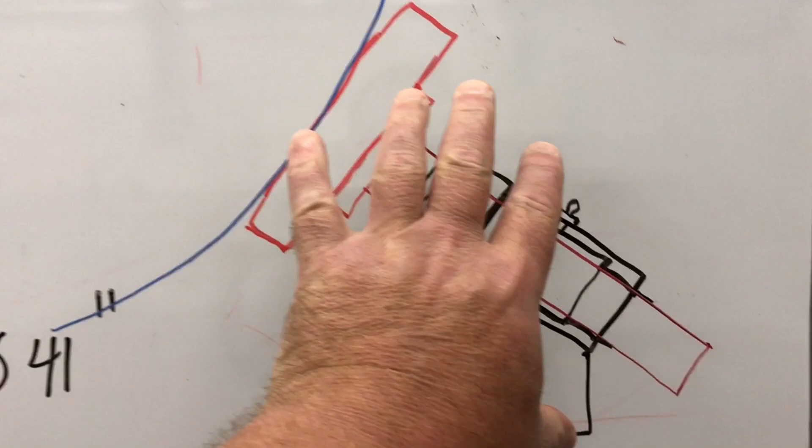Hello. Today I wanted to do a short video on trying to fix a purchased nut. What you see in front of me is an assembly I've come up with for the auger boring machine project, to support the pipe that runs along the skid. The blue part is the pipe, and this is the assembly that'll hold it, with a mirror image on the other side.

Unfortunately my whiteboard is full of other details I don't want to erase, so I've only shown half of it. But anyway, these two pads sit at 45 degrees like this, and the pipe sits in them so it acts almost like a V-block. Then this piece is a 2.5 inch diameter Acme rod, threaded, and this is an Acme nut.

And then this is a hex. You can put a large wrench on here and turn it, and you can move this out and in to adjust the pipe once you have it in, and also move it in a more coarse way to adjust for different sizes of pipes.

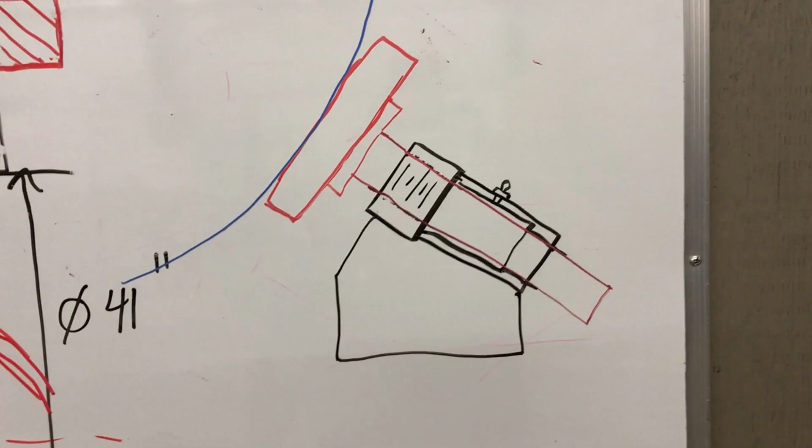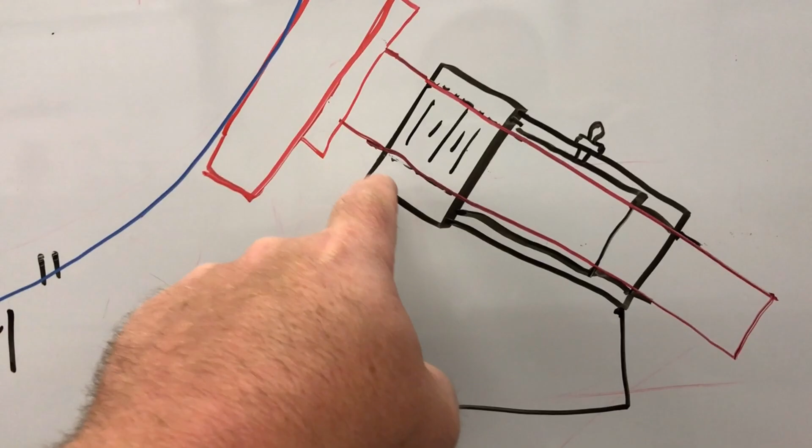The basic idea of the design is that there's just a frame here, and then there's a nut, and I need some support outboard of the nut because there's going to be a lot of force coming out from the weight of the pipe.

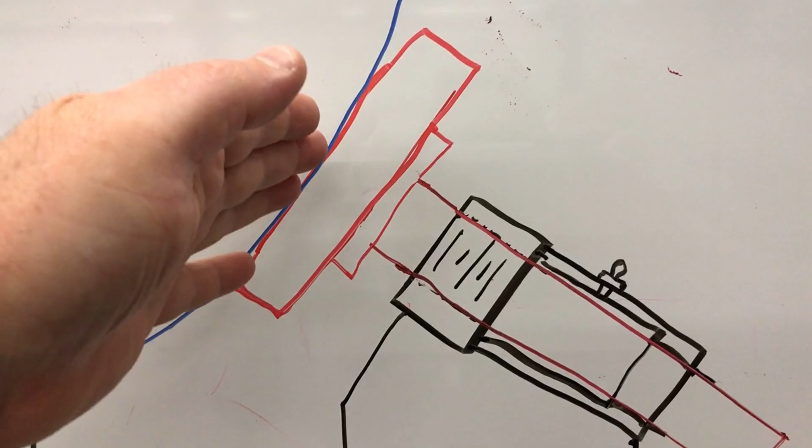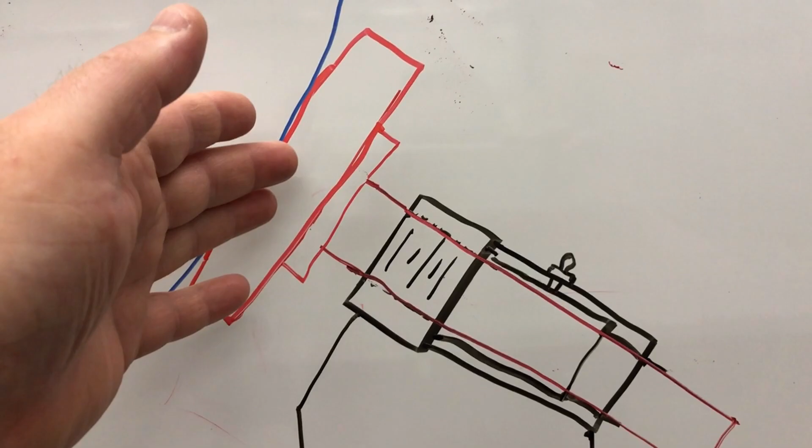The pipe itself with the augers and dirt in it could weigh 8,000 to 9,000 pounds. So you're looking at, say, 4,000 pounds on each one of these supports. And you could have hundreds or even maybe low thousands of pounds of force coming out from the friction of the pipe sliding along this support.

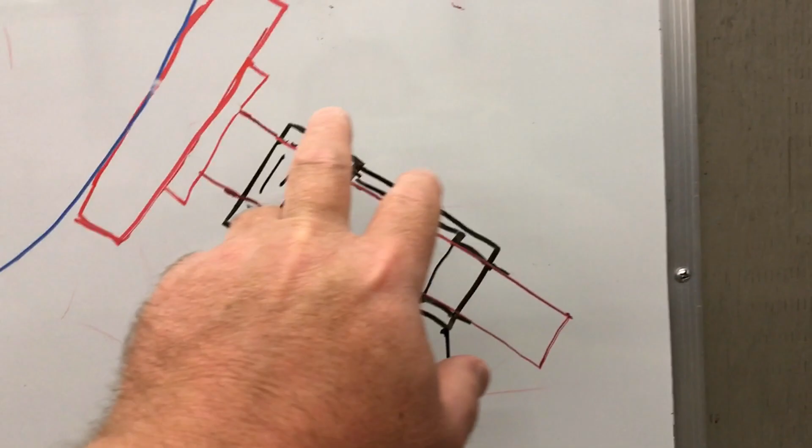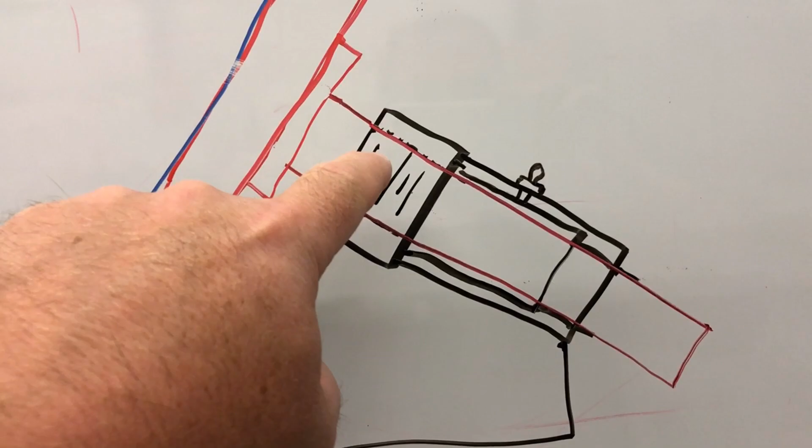So this Acme rod needs more support than just what this nut can give it. My plan was to machine a part like this, a round piece, and have it neck down to be just a close sliding fit over the major diameter of the thread, so it'll pass through the nut and allow it to advance or retract.

But this going on the OD of the thread will give it more support and just stabilize the assembly so it's not rocking back and forth.

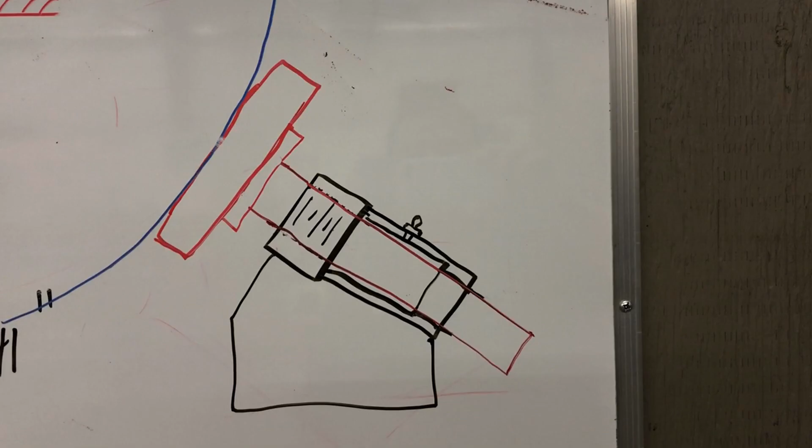It turned out I was able to buy Acme rod for probably just about the same price it would have cost me to buy the raw material if I was to make it myself. And I got nuts as well, so I didn't have to make the nuts.

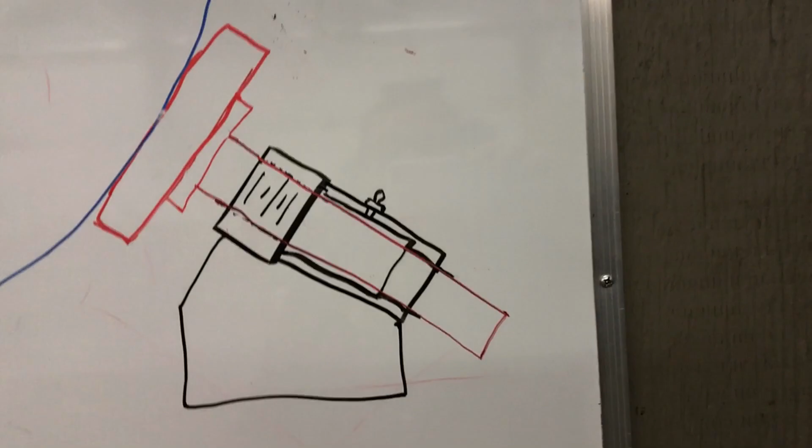One of the things I have to do is the nuts are hex nuts, and in this situation I want to machine the hex off and just make it round.

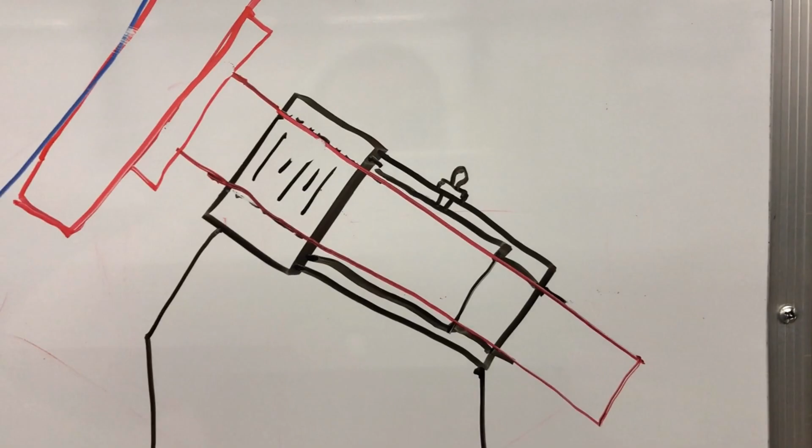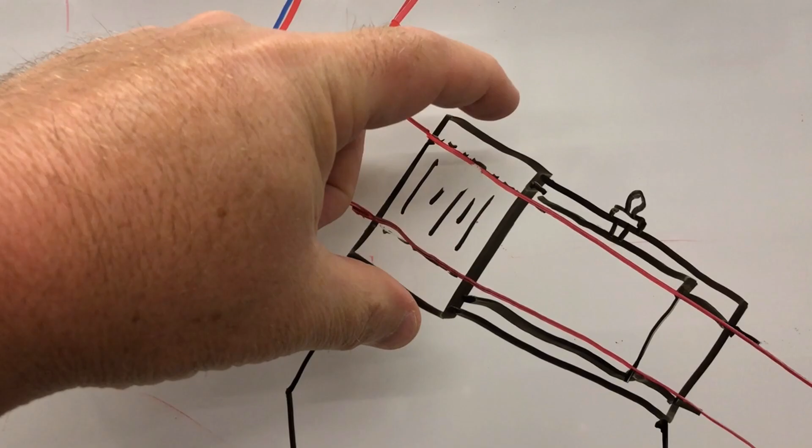To do this assembly, what I want to do is make this piece with the hole undersize, then weld it on, and then set it up in the lathe so that the pitch diameter, the axis of the thread itself, is running true, and then bore this out to size so that they're concentric.

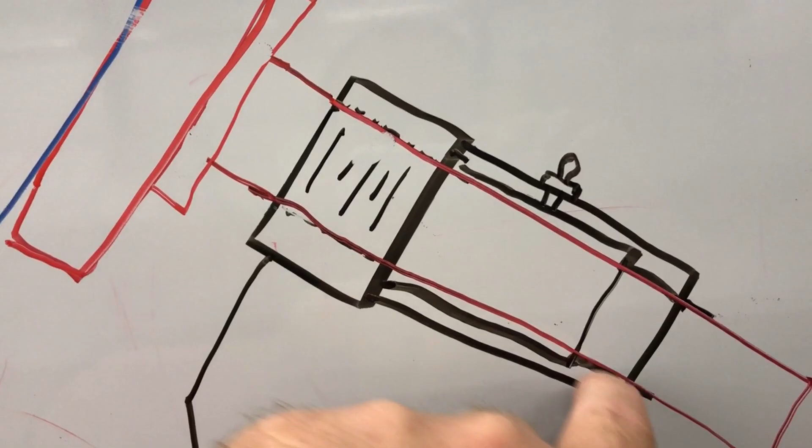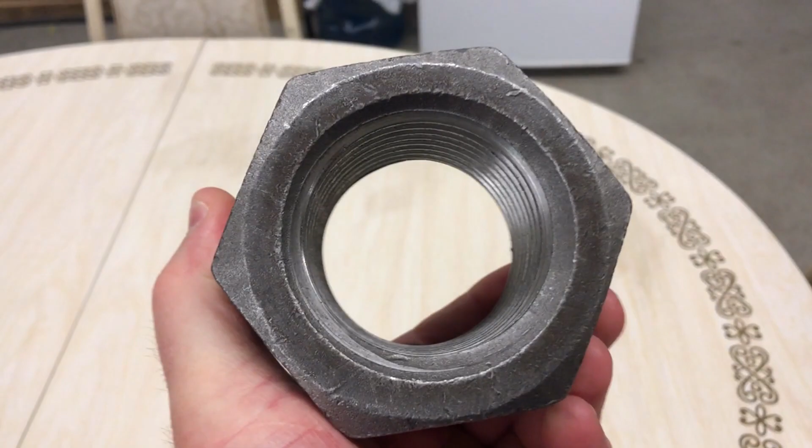And then this is the problem I ran into. This is one of the Acme nuts, and the manufacturer made essentially no attempt whatsoever to relate the axis formed by the pitch diameter of the thread to any of the other features on this nut.

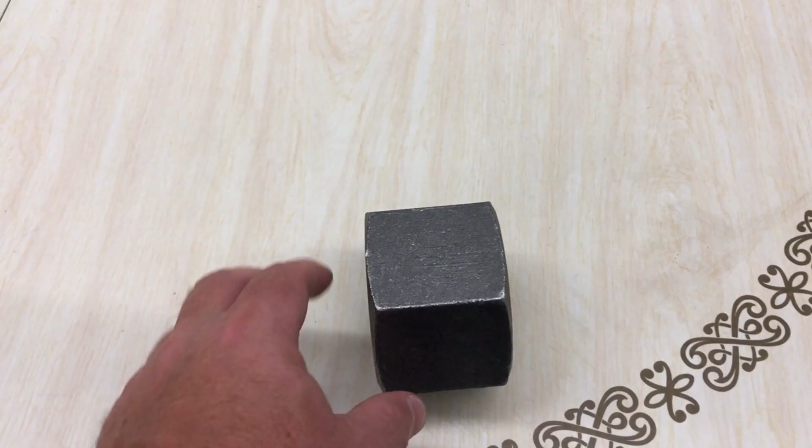So the hex itself tapers somewhat. It's not really noticeable by eye, but if you measure it with calipers you can see. The faces run out. If you were to mount this on a threaded rod so it's actually running on the threads, you see the sides of the nut just wobble, and not even necessarily together. They're out relative to each other, and they're out relative to the thread.

There's not a surface on here, not even the minor diameter of the thread, that's necessarily concentric to the pitch diameter.

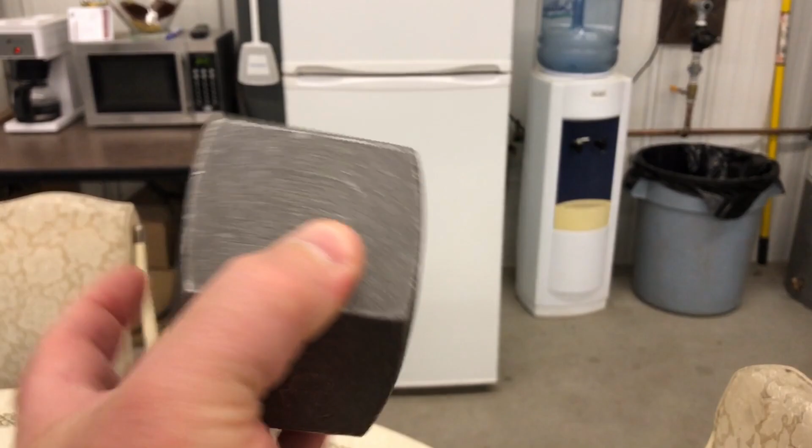I think when they make these, they form them and then grit blast them, and they get this sort of dull gray finish. Then however they machine the threads, they put it in a machine and machine them. And if you look at the minor diameter of the threads, it still has the grit blasted appearance.

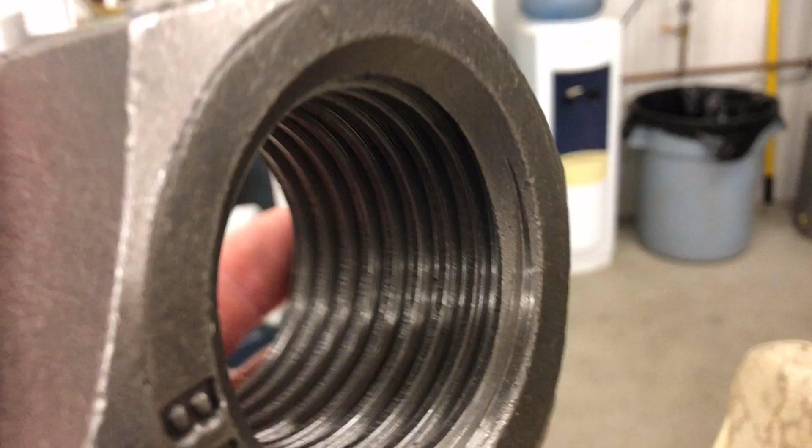So it's just whatever was there when the thing was first formed, and it doesn't even run concentric to the pitch diameter, so you can't even chuck up on the inside on the minor diameter to hold it.

So I needed to come up with a way to actually establish some features on this nut that would be concentric to the axis of the pitch diameter, and that was the purpose of this video. I wanted to show what I came up with.

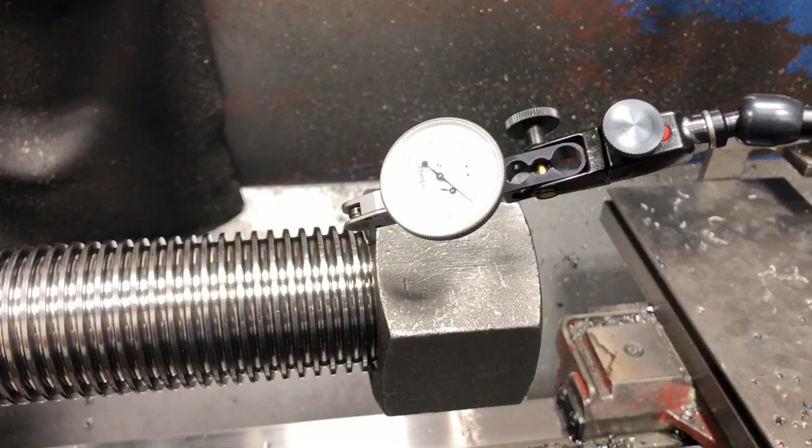I've put a nut on this lead screw, and the lead screw is running pretty true, within a few thou, and I just thought I'd show you some of the run out on the face of the nut.

We're at least 25 or more thou run out on that side. Same thing on the other side. 25, just about 30 thou run out on the face.

As I mentioned earlier, the minor diameter in the thread isn't concentric with the pitch diameter. The hex isn't related to the pitch diameter at all. Everything on the nut is out.

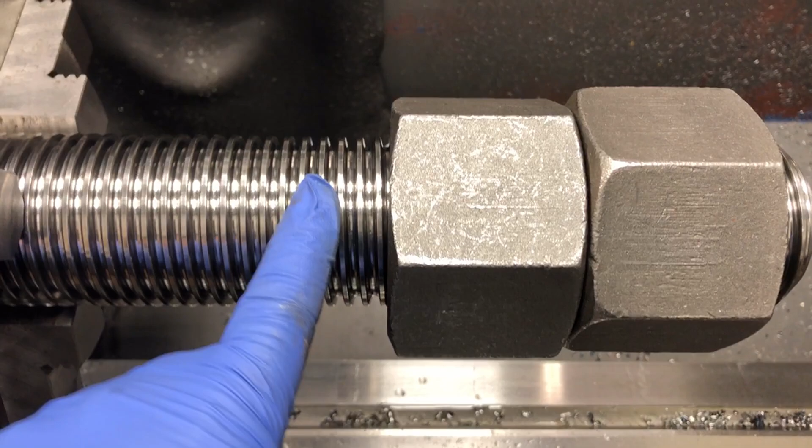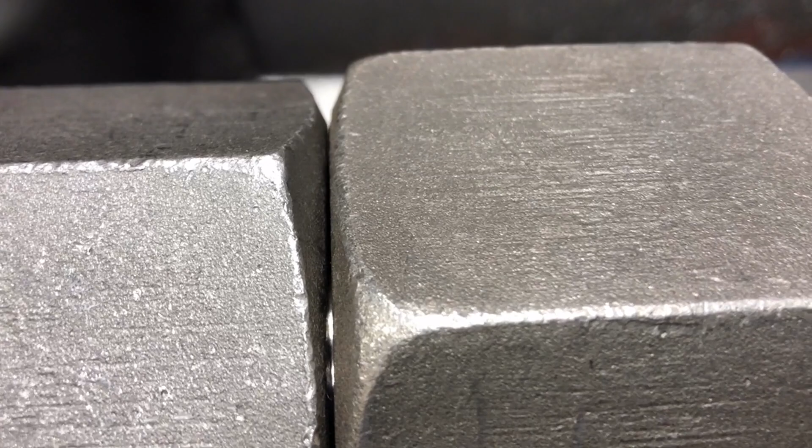This was my first attempt at trying to get the nuts to run on their pitch diameter by pushing them up against the thread flank of the outside of the threaded rod. But as you can see, at the top, the nuts are kind of touching, but at the bottom they aren't. There's a gap there.

What happens is when you tighten these against each other, the force is up here, so this nut goes that way and this nut goes that way, and they don't actually load equally on the thread flanks all the way around. I tried different combinations, flipping the nuts around, backing them against each other, hoping at least one combination would be flat. None of them would sit flat on each other.

So I thought for a while, I wasn't sure what I was going to do, and I came up with the following idea.

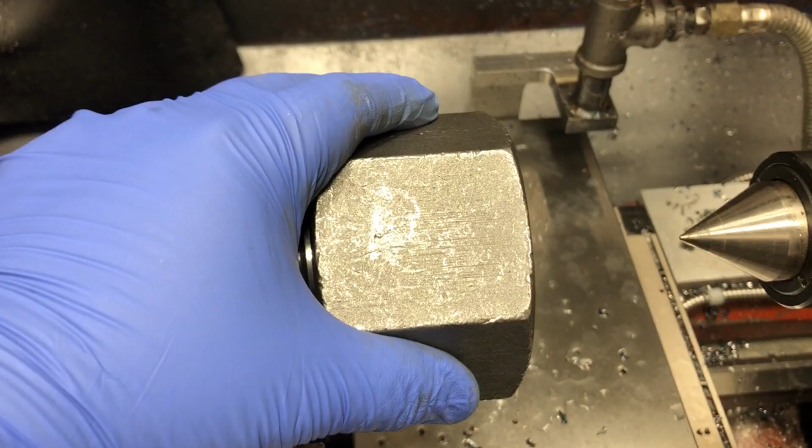Now, in order to get this nut to ride up on the flanks of the threaded rod and hold itself essentially square to the axis of the pitch diameter of the rod, you need - this nut's loose, it's got some play, not a lot, but it's got some. You need to find a way to load this nut so that it's being pushed evenly all around and not being pushed just in one corner.

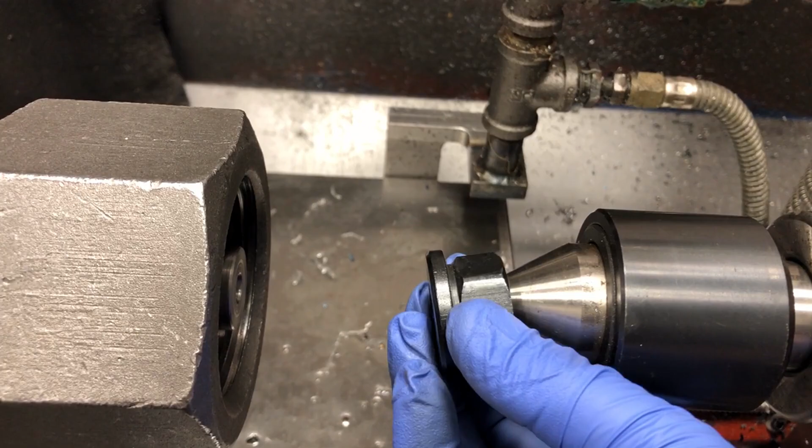And the technique I came up with was sort of like an equalizer bar. Put a bar across and then push it with a tailstock. What I did was, so the point wasn't just pushing on the bar - I'm gonna put a nut on here and push on it like that, and then this can pivot around to whatever it needs to.

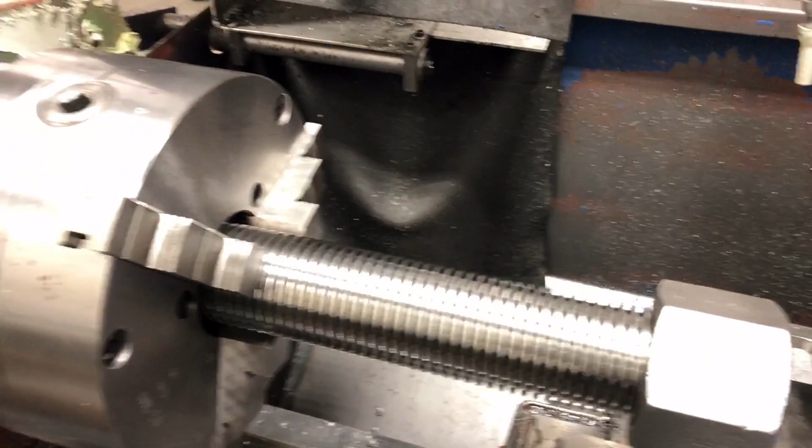This is an idea I got from David Wilkes from his excellent site. He uses this often because he turns from chuck to tailstock, and when he has big pieces in the chuck and he's turning, he just likes to support it with a setup like this so that the piece doesn't walk out of the chuck. It's actually a good way of supporting things like this because it allows it to go off at an angle, and it doesn't load the extreme point of the center where it might get damaged.

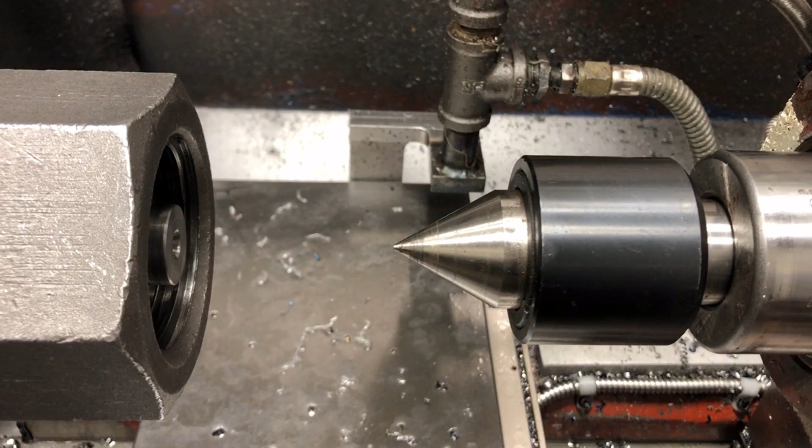And that's the setup. I couldn't show myself doing it because I need two hands. I don't have a stand for my camera, so I had to put the camera down. But you can see it's not perfect because it's only pushing in the two places, but it's very close to loading that nut up evenly all around so that it has a chance to load up on the thread flanks without being pushed off to one side.

What it does, however, is it makes it so you can't machine the end of the nut. Obviously the bar is in the way. So then what you do is you come in and you machine this face of the nut using this tool, and it gets pretty close to the thread.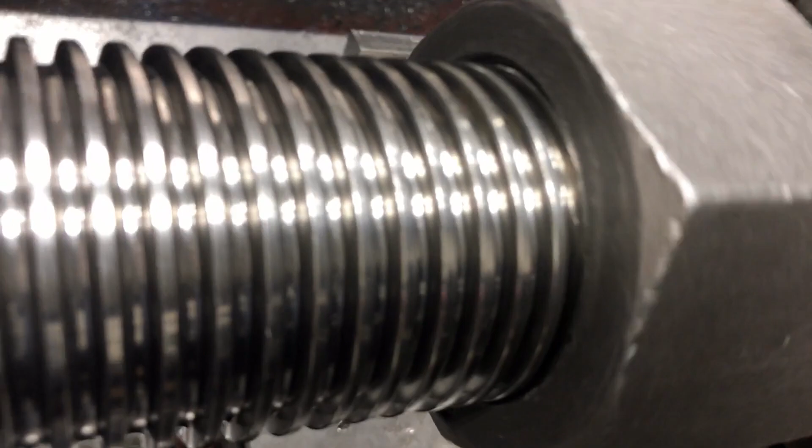I don't want to hit the thread on the threaded rod. What you do is you just go in with the tool with it not turning, and you touch on there, and then just back out about 10 thou and zero your readouts, and then you know to stop when you hit zero on your readouts.

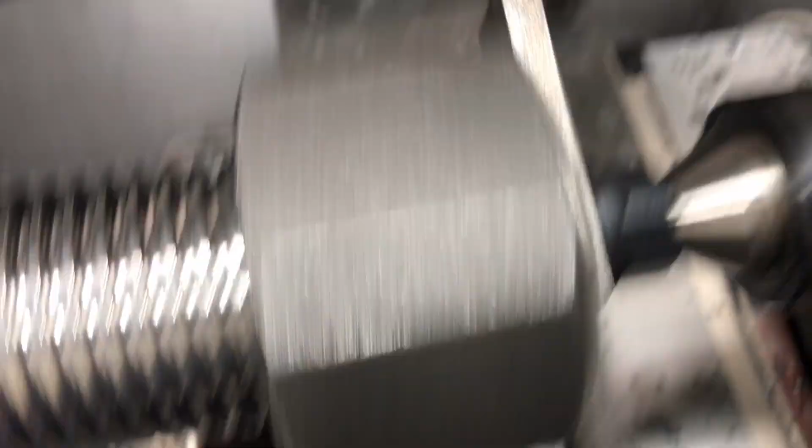In this view, you can see the wobble is pretty apparent, and that's what we're going to machine away. I've taken about a 15 thou depth of cut, pretty light depth of cut. I don't want to put too much load on this, as the nut's...

its resistance to the torque of cutting is simply the friction applied by the tailstock, by the force applied by the tailstock, causing friction between the thread flanks and the nut. So I really don't want to take a heavy cut and have the nut jam. If the nut does jam, it's going to want to start walking down the thread, and then it's really going to dig in. So I just need to be careful with the size of cuts.

Anything you do besides light cuts, keep your foot on the brake.

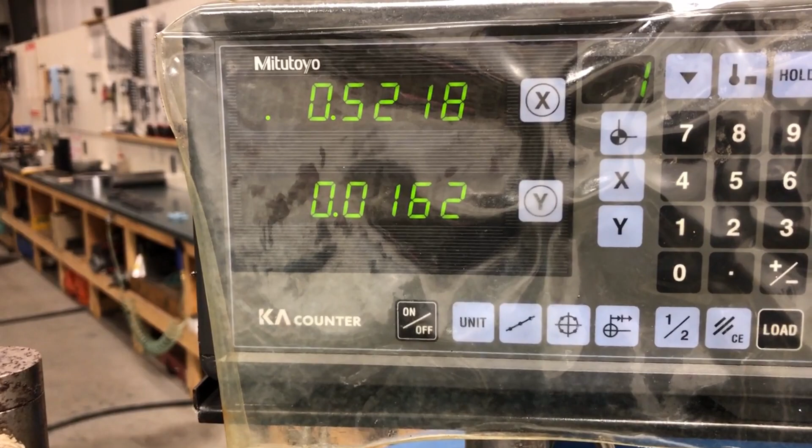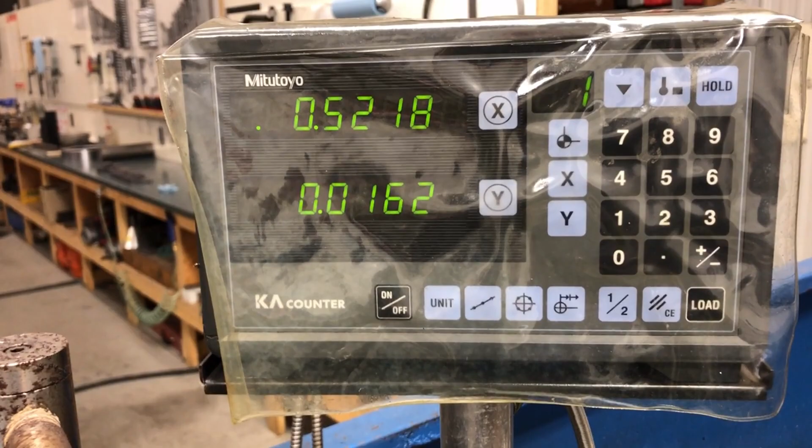Move the carriage over until it just touches, and then look at the readout. Now, what I didn't show you before was when I started the cut, I zeroed the readout. I originally took a 15 thou deep cut, and then I zeroed the readout. Now I see that I've been able to move the carriage a further 16 thou in pretty much the middle of the area that didn't clean up. So that tells you I need to take at least 16 thou for this to clean up. So probably what I'll do is take another, say, 15 thou cut, and then a 5 thou for a finish.

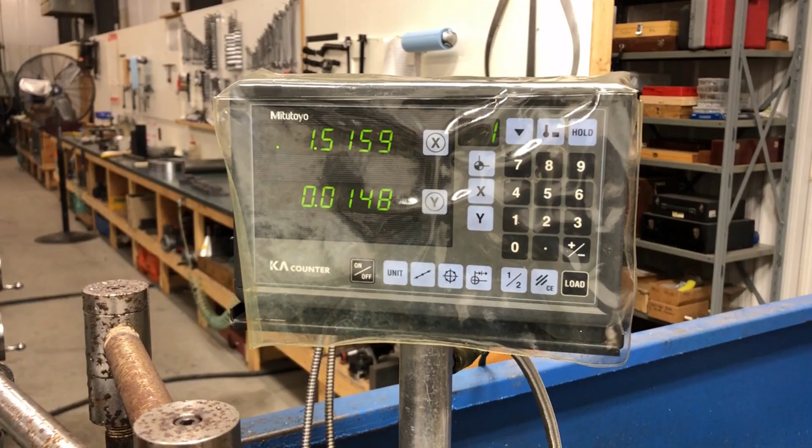Pounding, as there's a couple of letter B's stamped in the end of the piece, and that's what that pounding is. It makes an interrupted cut.

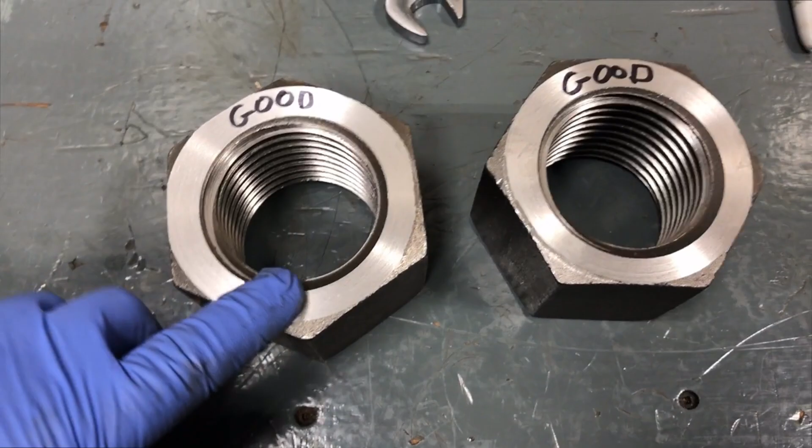And then I will set the other nut up and do that, and then I will show you how I do the opposite faces of the nuts. There, so now I have two nuts where the surface has been faced and it's good. It's square to the axis, and we can tell it's good because it says so right on there. Now what I'll do is, instead of using the same technique to machine the back side, now that I have two good surfaces, I'm going to put them on the threaded rod and back them against each other, and then I can machine each end.

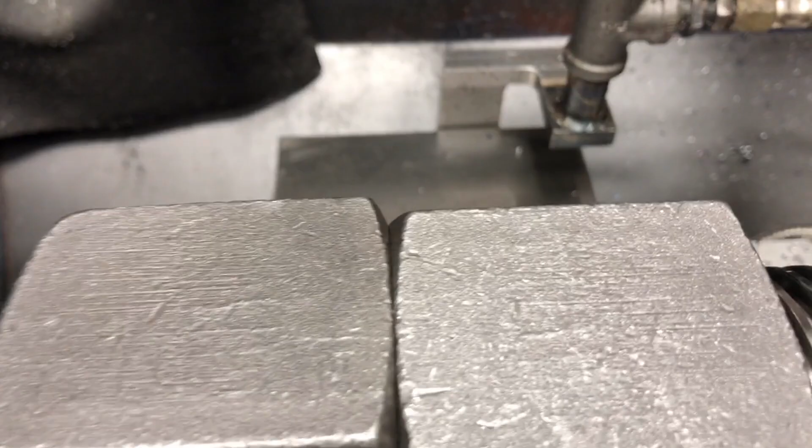So this is the setup to face the other two sides of both nuts. These are the two good surfaces backed against each other. There actually still is a very small amount of light, I'm not sure if it's going to show up very well or not. So they're not perfect, but they are a lot better than the original as-received nuts.

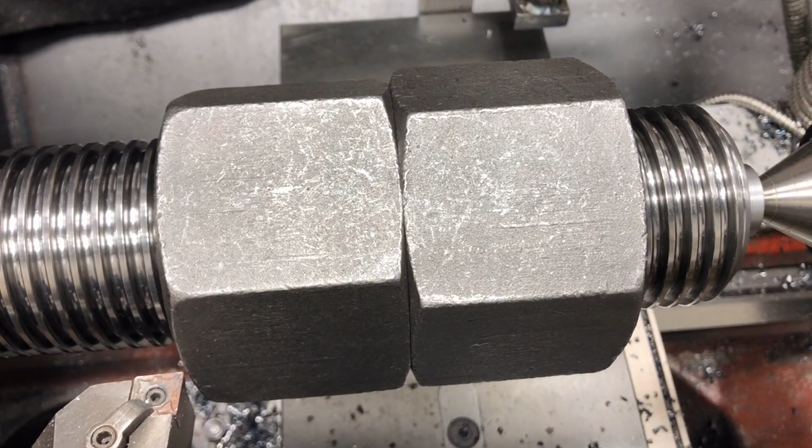And actually, I'm filming these a little bit out of order. This is the second set of nuts I've done, and the first set of nuts I didn't get any light between them, so those must have went a little bit better than these. But regardless, it's enough of an improvement for the job I have to do here, and it's definitely improved them over as-received. So just kind of the same thing, I'll take lighter cuts.

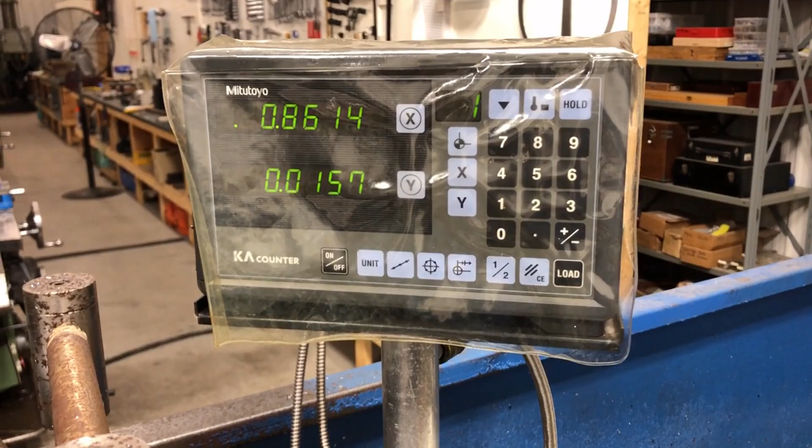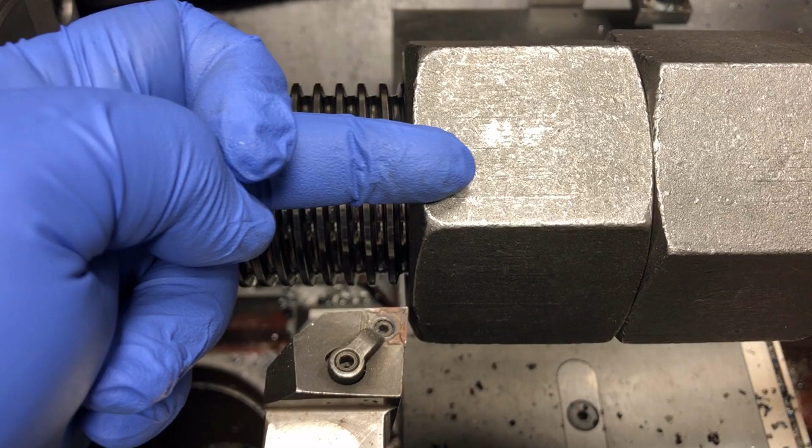Same issue: if the nuts jam, they're going to walk back this way towards the tool. Having thought about this since I did it, probably the safest way to have done this would have been to just take a normal right-hand turning tool instead of a left hand, turn it upside down, run the lathe in reverse, and feed in. That way, if the nut was to jam, the nut would want to walk away from the cutting tool instead of walking into the cutting tool. But I'll just take light cuts and it should be fine.

So this part's no different than what I did before. It's just a similar light facing cut with a foot on the brake.

That's just more of the same, I'll let that finish off. That end is finished. And now to do this end, you just use a regular right-hand turning tool and feed across the same way as before. A couple of passes and then a finishing pass, and that end will be done.

Both sides of both nuts are square and flat. That side is completed. So that's 4 nuts now that have been faced on both sides.

2 of them are going to stay as hex nuts, and they're going to end up being parted off to make jam nuts, which is part of this assembly. But 2 of them I'm going to machine the hex away and make the outside round, and that's for the ones that are welded onto the part that then has to be bored out.

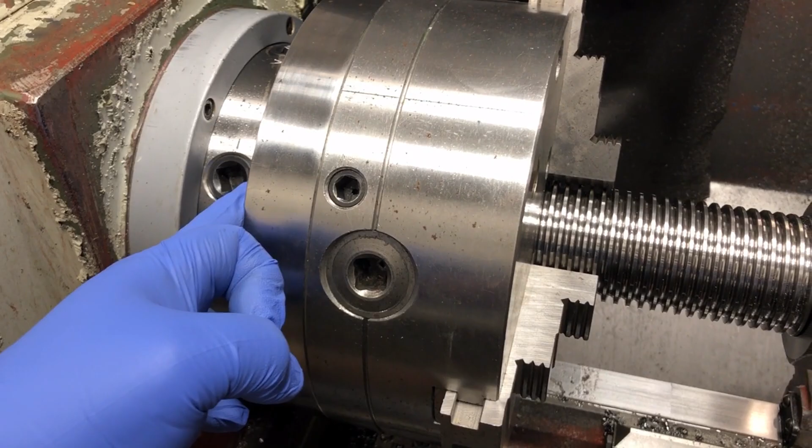One of the things I had to do at the start of the project was machine these threaded rods, just the ends for the various fittings that go on. This is as much as I could get the rod in - it won't go through the spindle of my lathe, it just gets into the chuck and stops. So you have to have a bunch of overhang. And I wanted to check what the runout was out here before I machined these ends on.

I thought I'd show you how I check the runout of an Acme thread. This is a problem I had yesterday when I was trying to dial this threaded rod in before I machined the end - how do you dial in that OD when it's always moving out from underneath the indicator? I'm sure guys I'm not the first to do this, but I've never seen it done - I came up with it yesterday on my own.

It's simply to engage the lead screw.

I know that this threaded rod is 4 threads per inch. I set my lead screw up to thread 4 threads per inch, and then I set the stylus on the top of the thread where I want to dial, and then just engage the half nuts and let it turn. Now it obviously wanders to the left and gets out of the range where you want to dial in, but for a couple of revolutions anyways, it's pretty close to where you want to dial in.

Essentially I just hold the threaded rod between centers so it's running true and it's stiff. Screw this nut up against the jaws, and then screw this one up against there. I don't have a wrench right now that's big enough for this, so what I've used are just some C-clamps - clamp them on like that, and use those like a wrench. I can get it tight enough that I'm able to take these cuts. I'll probably just take light cuts anyways, so nothing moves.

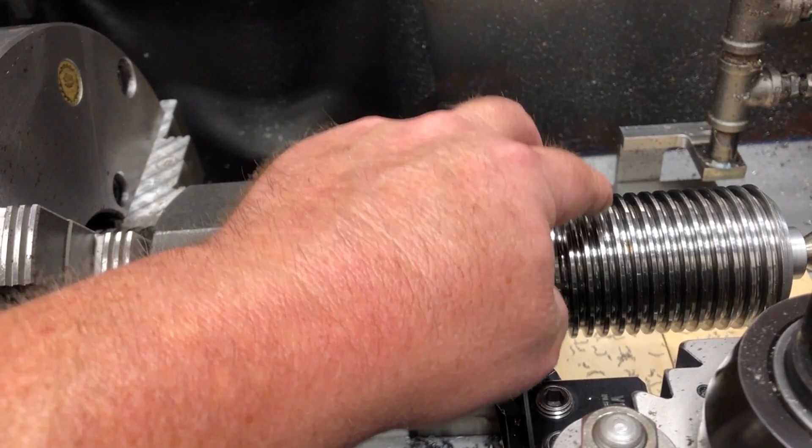But you can see now my faces are running true. Both nuts are tightened against each other, so they've centered themselves on the pitch diameter of the threaded rod, so it should be concentric. The thread in the nut should be running concentric to the thread on the threaded rod. And now I'll turn the outside, and then the outside should be concentric to the threaded rod, which is ultimately what I'm trying to do, so that I can bore out the piece that's welded onto here and have it be concentric to the outside diameter of the threaded rod, as I mentioned at the beginning.

Remove the hex, and the OD is now running concentric to the axis of the pitch diameter, and the ends are perpendicular to that axis. Now I have 3 surfaces on this nut that correspond to the threads cut through it, and that'll allow me to accurately place the piece that will be welded on here.